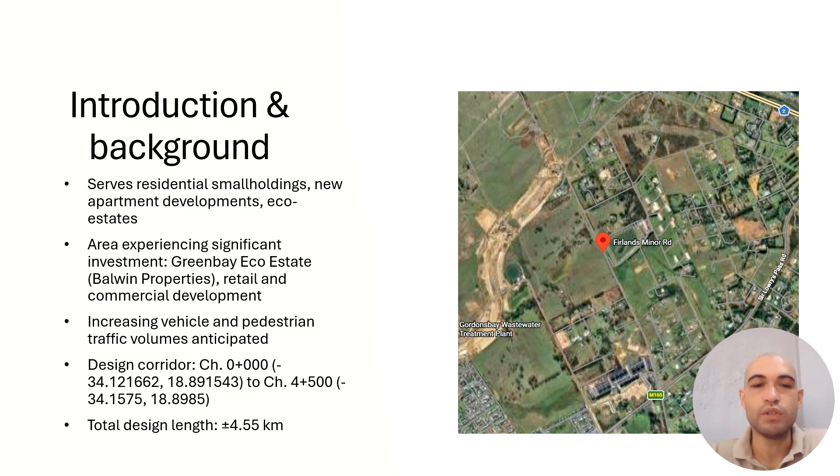This is through a mix of agricultural smallholdings and some properties that are used for horses, as well as newer residential and commercial development. This newer development includes the large-scale Greenbay Eco Estate, which is currently under active construction. This growth means that traffic volumes on Firlands Minor Road are projected to increase substantially over the coming years. So my design corridor covers approximately 4.55 kilometers, which falls within the required design specification.

I conducted on-site visits to Firlands Minor Road to assess its current condition, and I identified a number of critical deficiencies that motivate this upgrade. Firstly, the road has no formal pavement layer works. It exists as a natural gravel surface with no engineered base, subbase or selected subgrade, and this means that it has no structural capacity to carry current or projected traffic sustainably.

Secondly, the geometric alignment is inadequate. There are no formally designed horizontal or vertical curves, so the road width is inconsistent, and certain sections have permanent obstacles and bottlenecks with no warning signs. This creates a real safety risk. Third, there is no formal stormwater drainage infrastructure, so given the high rainfall in the area, uncontrolled runoff crosses the road surface and causes erosion and damage after a significant rainfall event.

Finally, there are no road markings, signs, or formal shoulders. This leaves the road user without guidance, particularly at night or in poor weather. So in short, Firlands Minor Road cannot safely or sustainably serve current traffic, let alone the growth expected from the area's development, which is why this upgrade is clearly justified.

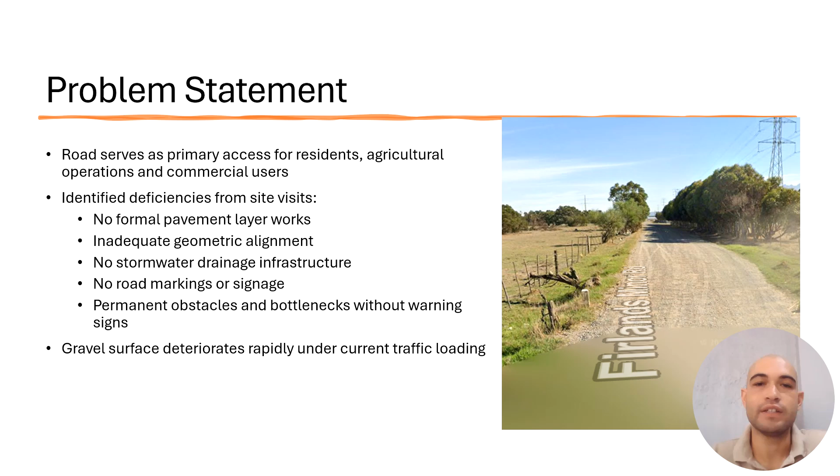My aim was to produce a comprehensive geometric and pavement design to upgrade Firlands Minor Road from a gravel road to a standard surfaced road, and this is done in accordance with South African design standards: TRH 17, which is used for geometric design of rural roads, and TRH 4 for the structural design of flexible pavements, as well as TRH 26 for traffic data, and the SANRAL geometric design and drainage manuals.

So before starting with the design itself, I collected key input data: traffic data to establish current and projected demand, and the climatic and environmental conditions of the area. A Mediterranean climate with mean annual rainfall of 725 millimeters, concentrated in the winter months, which has a direct bearing on both pavement moisture sensitivity and drainage design.

The scope of work covers the full horizontal, vertical and cross-sectional design of the 4.55 kilometer corridor in AutoCAD Civil 3D; manual and Excel-based horizontal curve calculations; pavement structural alternatives from the TRH 4 catalog; the earthworks and mass haul quantities from Civil 3D; a conceptual stormwater drainage design; and a full set of design drawings.

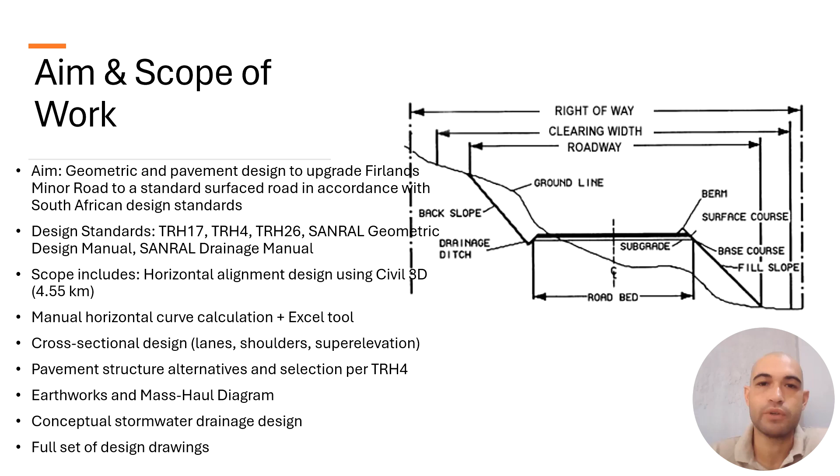With the design base established, I'll start with the traffic analysis. So the current annual average daily traffic on Firlands Minor Road is 3,097 vehicles per day. Light single-axle vehicles make up the majority at approximately 88.7%, or 2,748 vehicles per day. Two-axle trucks contribute 227 vehicles, which is around 7.3%, and three-axle trucks contribute 39 vehicles, about 1.3%.

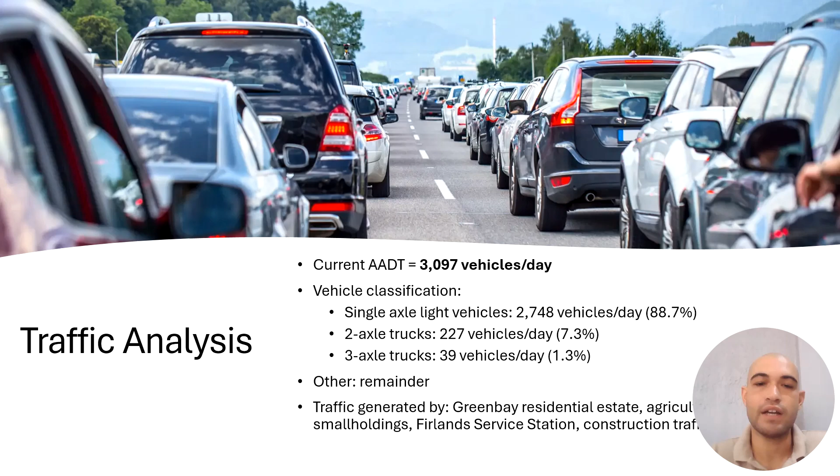This traffic is generated primarily by the Greenbay residential estate and its construction activity, the agricultural smallholdings along the corridor, the Firlands service station, and the surrounding rural residential properties.

So turning now from the traffic to the ground itself, I assessed the subgrade CBR at 100-meter intervals along the full design corridor. This is using the mean minus 1.282 standard deviations to determine the design CBR at the lower 10th percentile. So this identified 8 uniform subgrade areas.

Subgrade areas 1, 2, 3, 7, and 8, covering most of the corridor, classify as SG1, with design CBR values above 15%, which reflects the good quality residual soils and alluvial gravels in these zones. Areas 4 and 6 classify as SG2 at 8.85% and 10.19%, respectively, requiring moderate pavement thickness.

So the critical zone is subgrade area 5, which covers chainage 2,100 to 3,100, which classifies as SG3 with a design CBR of only 4.87%. This corresponds to shale geology, which produces clay-rich, moisture-sensitive soils with poor bearing capacity when saturated. This SG3 subgrade governs the pavement thickness design for the full corridor, and I've recommended lime stabilization in the zone.

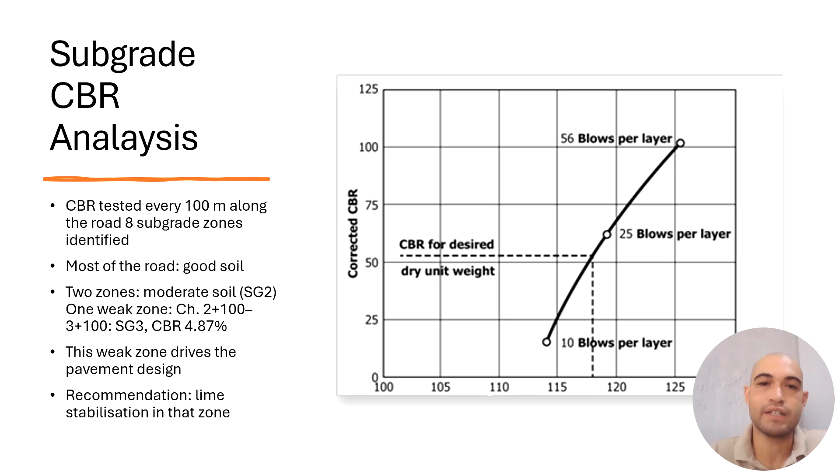With both the traffic and subgrade now defined, the pavement structure was designed using the TRH4 design catalog, governed by the ES10 pavement class and SG3 subgrade CBR of 4.87%. I generated all the feasible pavement structure alternatives from this catalog

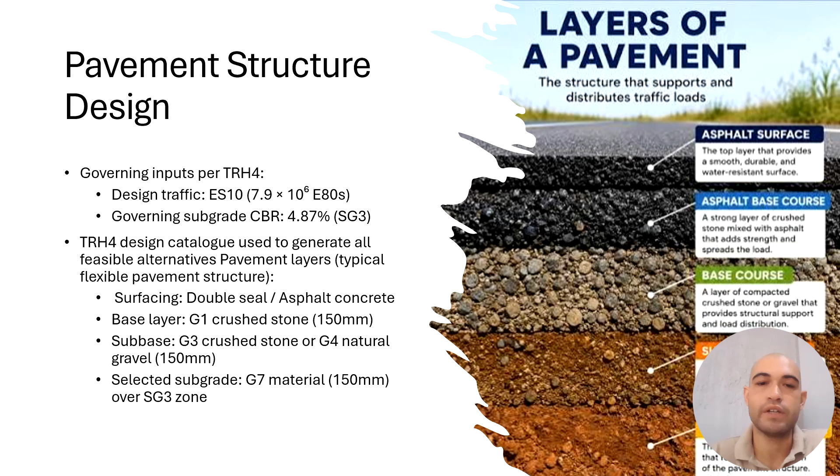SG3 combination and selected a structure consisting of an asphalt concrete or double seal surfacing layer, a 150 mm G1 crushed stone base, a 150 mm G3 or G4 subbase, and a 150 mm G7 selected subgrade layer over the SG3 zones. I selected this alternative based on structural adequacy for the ES10 traffic loading, the availability of G1 crushed stone from Western Cape quarries, constructability given the site access conditions, and whole life cost.

With the engineering inputs in place, I'd like to walk through the key steps I followed in AutoCAD Civil 3D to produce the geometric design. So I started by importing the raw survey data, the elevation and coordinate points collected for the project area, and used these points to build a 3D surface model of the existing terrain. Switching from a full point display to a clean contour representation once the surface was created, so that the model was easier to work with.

On top of the surface, I created the center line alignment for the proposed road, which automatically generated station values and curve radii along the full corridor. I then checked every curve radius against the TRH17 minimum radius requirement for my design speed of 60 km per hour and adjusted any curve that fell short, so the finished alignment fully complies with TRH17.

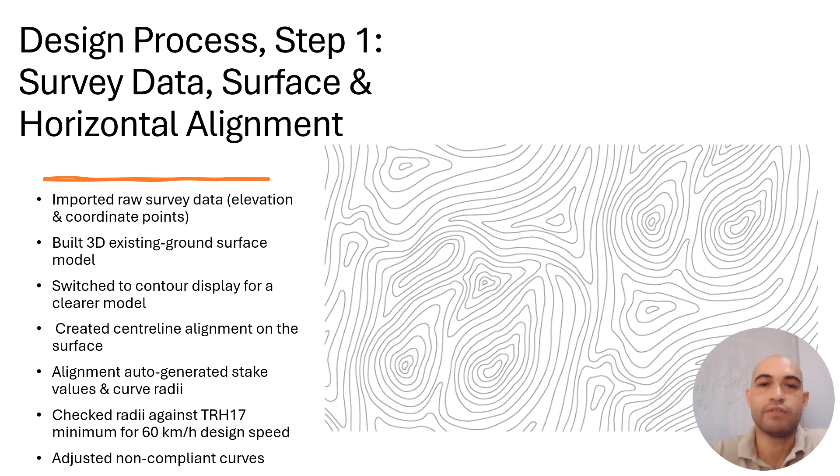With the horizontal alignment finalized, I added it to the surface model to extract a ground profile. Then set up a profile view spanning the full 4.55 kilometer corridor, defining the vertical exaggeration and elevation range for a clear read of the terrain. Within this profile, I designed the vertical alignment, the grades and vertical curves for the road, and Civil 3D generated a grid of every K value and curve length for review.

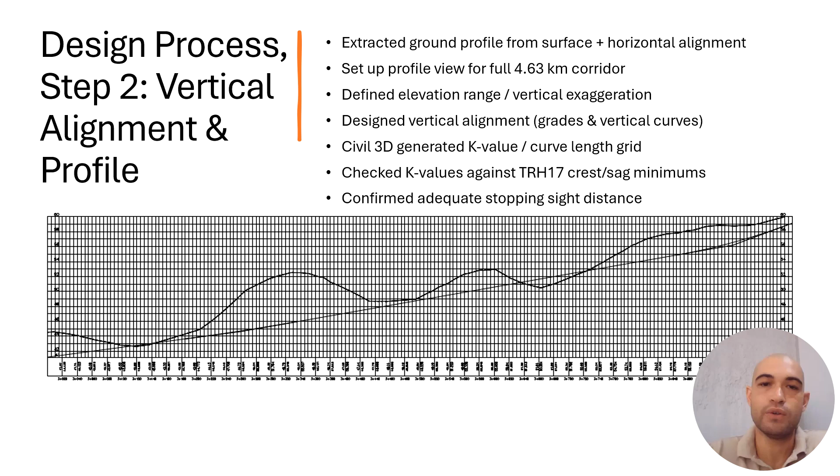I checked each of these K values against the TRH17 requirements for crest and sag curves at my design speed, confirming that adequate stopping sight distance is provided along the entire corridor. The final modeling step was building the design corridor, a 3D model that combines the horizontal alignment, the vertical profile, and a typical cross-section of 7.4 meter carriageway with 1.5 meter shoulders, which Civil 3D uses to generate cut and fill along the road.

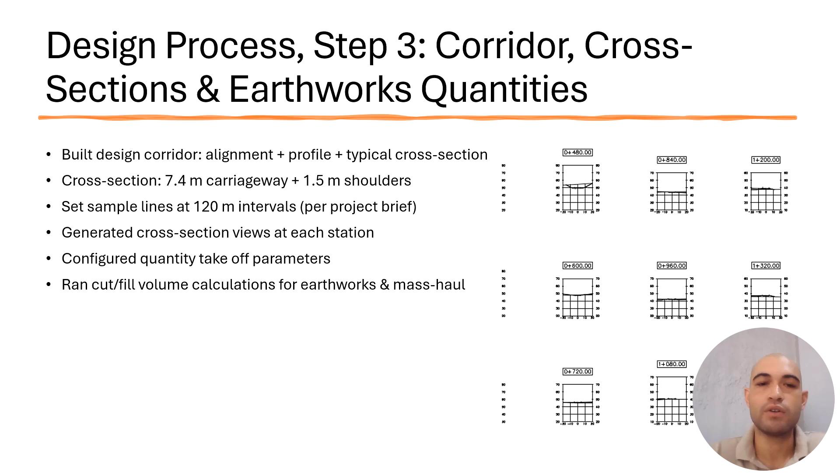I set up sample lines at 120 meter intervals as specified in the project brief, and generated cross-section views at each of these stations for the full corridor. Finally, I configured the quantity takeoff parameters and ran the volume calculations against the full finished corridor, producing the cut and fill quantities that feed into the earthworks and mass haul analysis.

So moving from the geometric model to hydrology, a conceptual stormwater drainage design was developed for the 4.63 kilometer corridor in line with SANRAL Drainage Manual 6th edition. With 725 millimeters of annual rainfall concentrated in the winter months and mountainous terrain generating significant catchment runoff, adequate drainage infrastructure is critical to the road's long-term performance. The design includes cross-drainage culverts at every natural drainage crossing, with drainage locations shown on the design drawings.

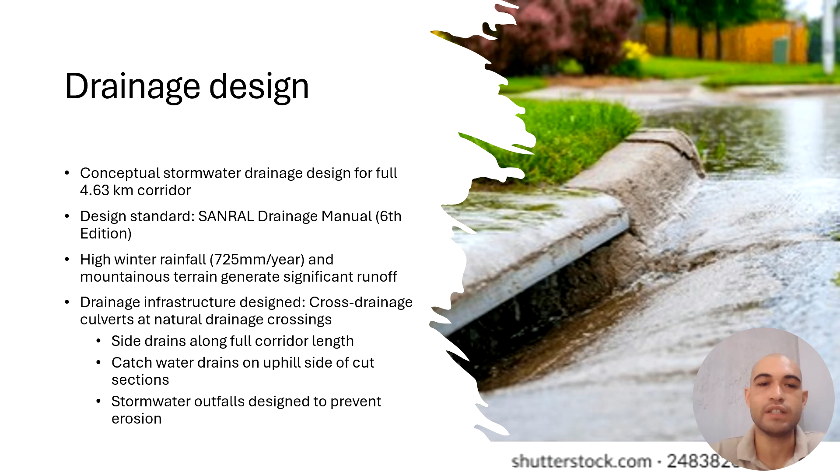Side drains on the full corridor to convey roadway runoff to the culvert inlets and outfalls. Catchwater drains on the uphill side of cut sections to intercept the hillside runoff before it reaches the carriageway, and subsurface drainage at the cut-fill interface to prevent subgrade saturation.

All of this design work is captured in a full set of drawings produced in Civil 3D. This includes the plan view of the corridor, showing the horizontal alignment, curve data, and drainage layout. The long section showing existing and proposed ground levels, gradients, and vertical curve data. Cross sections at 120 meter intervals showing cut and fill areas and pavement layers.

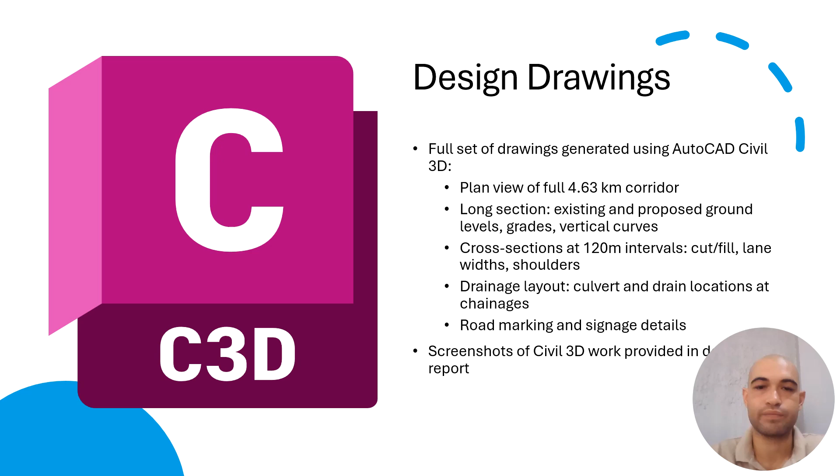This project has delivered a comprehensive geometric and pavement design for the upgrade of Firlands Minor Road, from its current gravel condition to a standard surfaced road. The 4.63 kilometer design corridor meets the project specification requirement of 4 to 5 kilometers. The design traffic was calculated as 7.9 times 10 to the power of 6 E80s over a 20-year design life, placing the road in TRH4 pavement class ES10, which is governed by an SG3 subgrade CBR of 4.87%.

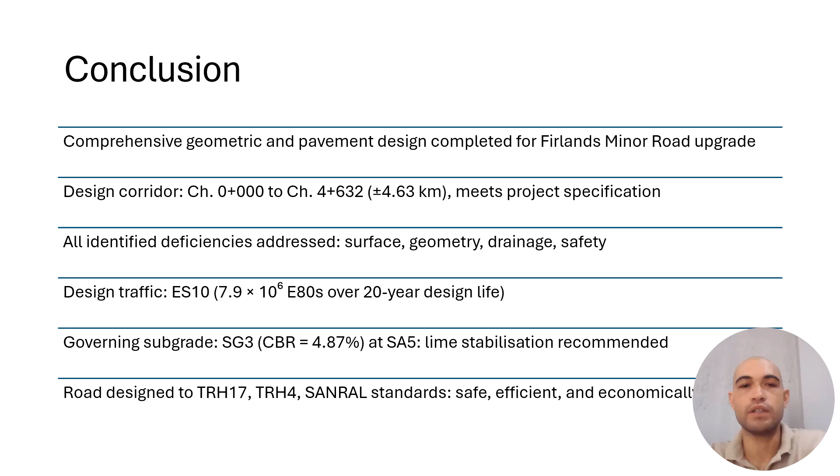The road has been designed to TRH17 geometric design standards at a design speed of 60 km per hour, with a 7.4 meter carriageway and 1.5 meter shoulders. This upgrade directly addresses every deficiency I identified: the inadequate surface, the poor alignment, the absence of drainage, and the lack of safety measures, reducing vehicle operating costs, improving road safety, and supporting the continued responsible growth of the Helderberg rural community.